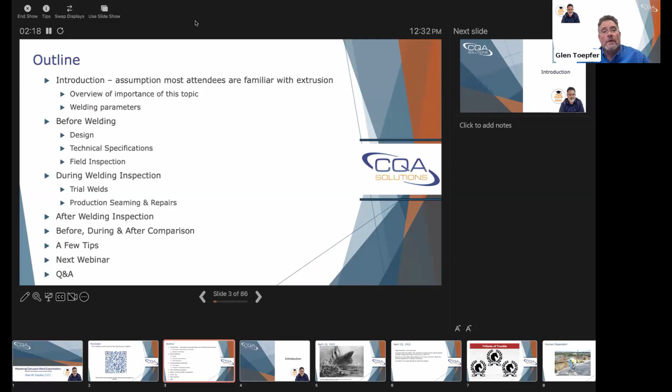As we get started here, I think the introduction I wrote for this was about the Titanic, and as we go through this, you'll see why I compare it to the Titanic in more ways than one. April 15th, 1912, was the day the Titanic famously sank after hitting an iceberg late on the 14th of April. Approximately 1,500 lives were lost.

Accounts state that the Titanic was ordered to proceed at full speed ahead, despite multiple iceberg warnings. My research showed there were at least 6 reported warnings on the 14th, iceberg warnings. They say the vessel was traveling at 22 knots, and because of that speed, when lookouts saw the iceberg, they couldn't avoid hitting it—they couldn't turn fast enough because of that speed.

I think that's one of the things in our industry, particularly in relation to extrusion welds—a lot of times it's full speed ahead, and I think we need to actually take a little warning and slow things down. I'll show you why here as we get into it.

One of the things is the trifecta of trouble, as we coined it last night when I was finalizing the PowerPoint. Extrusion welds really are error prone. They're difficult to weld, and their locations typically aren't the best places—they're being extrusion welded because you typically can't run a wedge welder there.

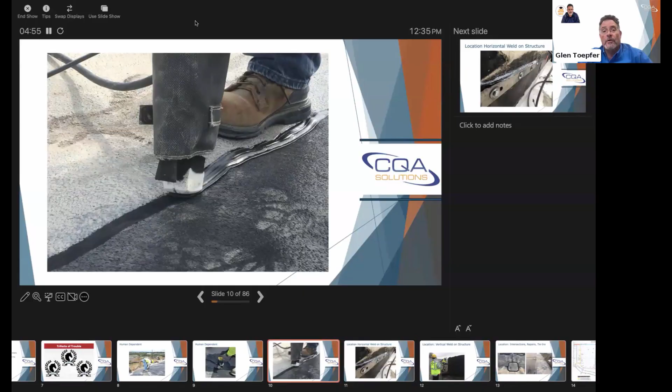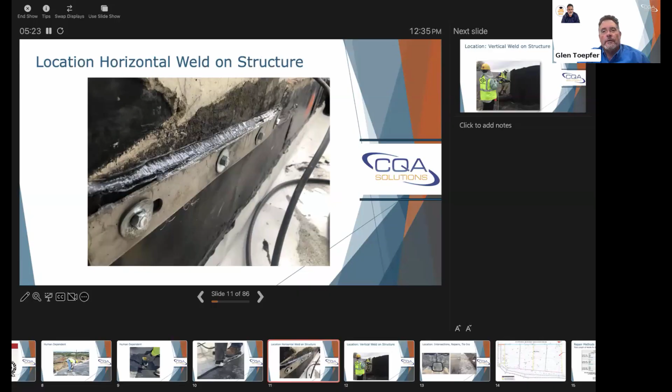Then we'll get into the locations. Here's an example—there should be caulk on the top of the batten strip hopefully, but you can see on this vertical wall there's a horizontal extrusion weld taking place on this structure, where they have to hold and support the machine in the air, which makes it more difficult than when you're welding on the ground. You're fighting gravity when you're supporting the machine.

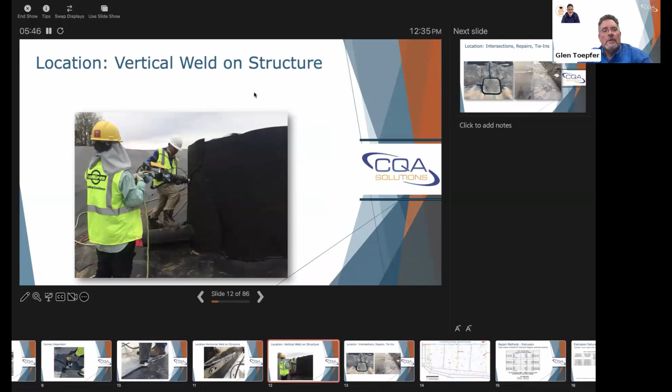Similarly, here's welding on a vertical structure where they're doing a vertical weld, but also going around—so some horizontal, different angles—and they have to keep that uniform pressure on there if you want a uniform weld. I'll get into that in a bit. As for location, intersections—you're always going to have your repairs at intersections.

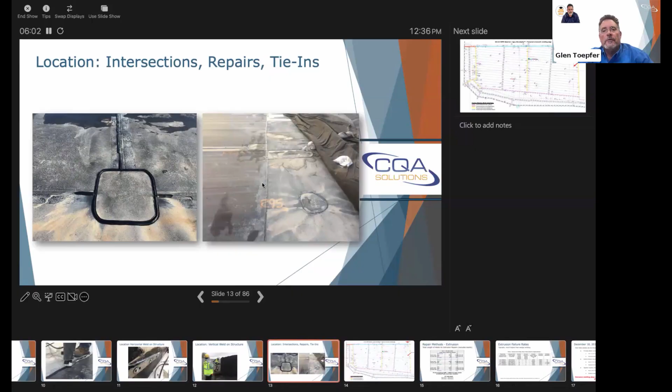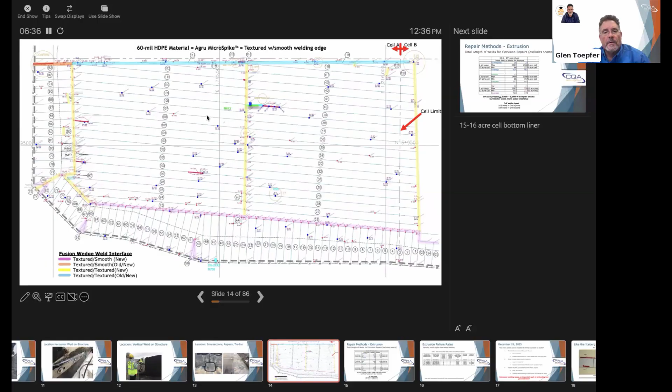Tie-ins, a lot of tie-ins can't be wedge welded for one reason or another. And you look at the whole scheme of things, this is an as-built of a cell I used in a previous presentation, but all of these dots here are intersections. Each one of those is going to have an extrusion repair performed on it. Some of these tie-ins up on the north side here were extrusion welded. Some of the area in your sump down here was extrusion welded. Just a lot of different things going on with the welding as far as it all adding up.

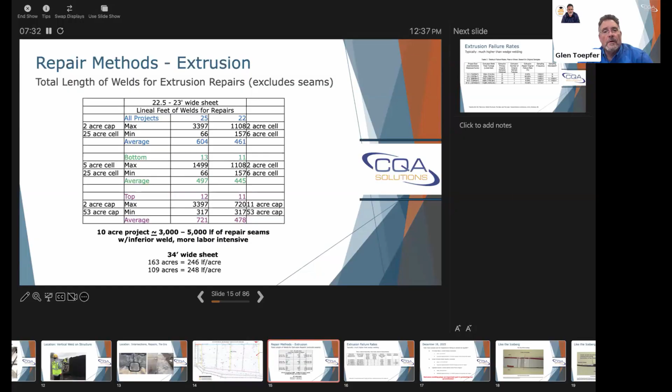A lot of people don't realize how quickly the extrusion footage adds up, but we looked at a bunch of our projects and came up with an average: a 10-acre project averaged between 3,000 and 5,000 lineal feet of repair seam. That doesn't include your regular production seams or tie-in seams. This is all just repairs. So you're putting out nearly a mile of extrudate on a 10-acre impoundment or containment system, or whatever the project may be. It could be a cap, whatever it is. But these are all labor intensive, inferior welds, and for the most part the quality is really not being monitored that much. That's part of the reason for this webinar, really, is to look at that and give you all some things to think about.

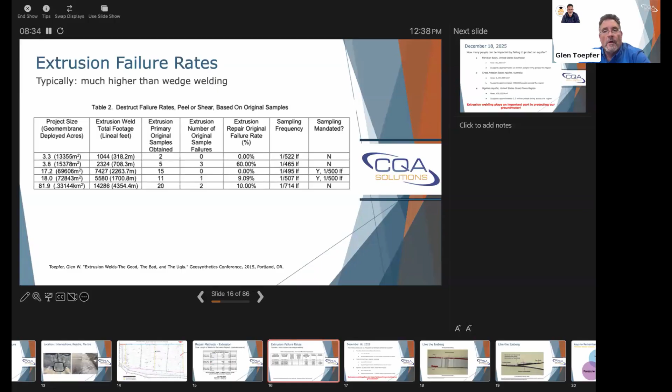So that really brings us from the Titanic to today, December 18th. Where are we? As I was thinking about it, I thought, well, the purpose of our containment systems is to protect aquifers. The Titanic, they lost approximately 1,500 people. How many would be impacted by contaminated aquifers? If you look at the Floridian Basin in the southeast United States, I forget exactly how many states that impacts, but it's an area of 161,000 square kilometers, and that supports nearly 10 million people living across the region. Similarly, the Great Artesian Basin Aquifer in Australia, 1.7 million square kilometers, but that only supports 180,000 people across the region. But size doesn't really matter. You don't want to impact it regardless. You want to keep the water safe and clean.

I'm going to butcher this name, I'm sure. I was trying to say it last night, but the Ogallala Aquifer in the Great Plains region of the United States, approximately 450,000 kilometers squared, and it supports about 2.3 million people living across the region. So we want to protect those people. And extrusion welding is a pivotal and important part of protecting our groundwater because it's a significant quantity of it in our containment systems.

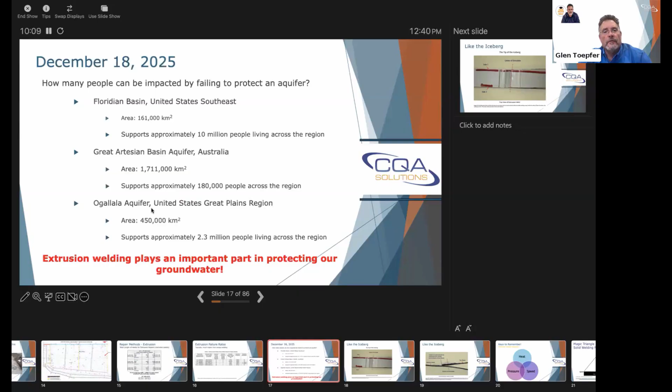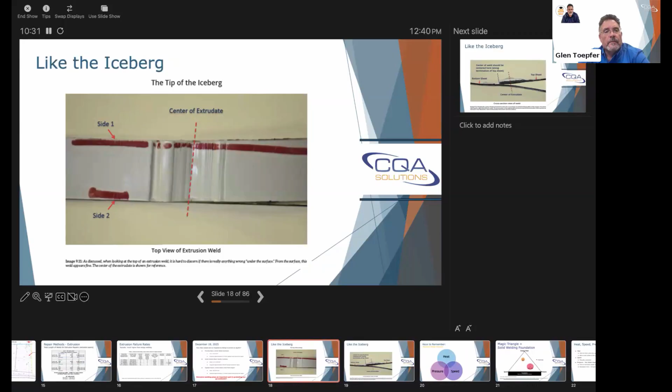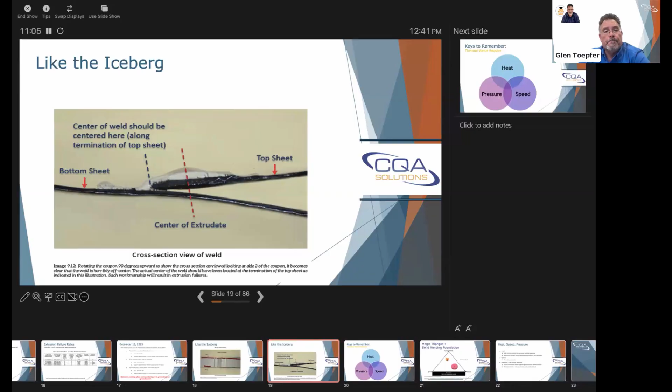And just like the iceberg with the Titanic, you're looking at a finished extrusion weld here. This is a coupon we had for sampling. Everything looks good on the surface, like the Titanic. Maybe they thought the iceberg was smaller, I haven't read it in detail there, but like they say, you don't know what lies below the tip of the iceberg. And when you look at this, you can see the center line of the weld. That joint should have been over here where the blue line is at, that's where your physical joint is at, but it's not there. You can see some squeeze out on the one side here, it's a little bigger than the other side, and I'll get into squeeze out in a bit. But those are things to look at for the quality of the weld too. It should be uniform if your person doing the welding has uniform pressure on, which we'll get into. So you just can't see what's below there.

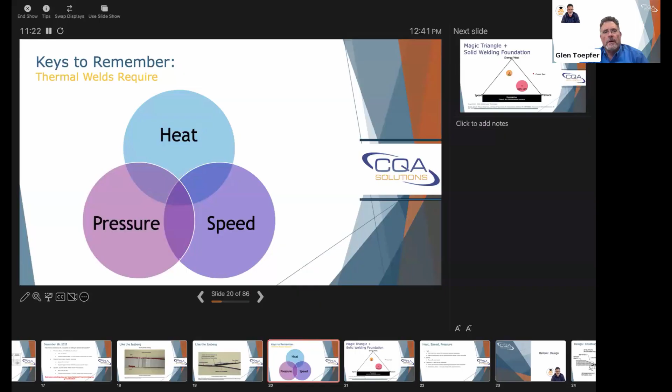Then it ties into your heat, speed, and pressure. As I mentioned earlier, those are the three things you really want to look at as we go through this whole presentation, as well as location and the other things I mentioned. But to get a good weld, you have to do your best to get that heat, speed, and pressure. Eddie Weisser from Leister presented this magic triangle concept to me years ago.

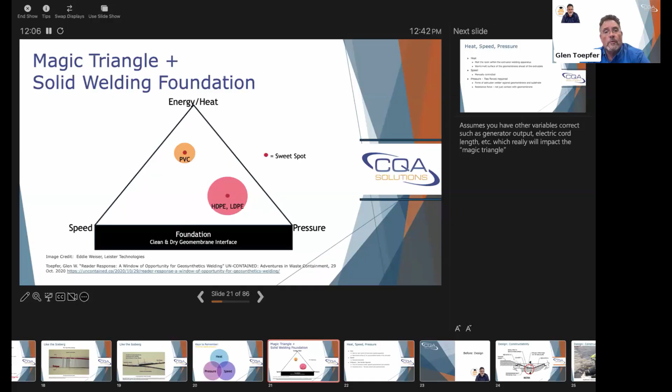How do you look at heat, speed, and pressure with an extrusion? You have two different heats on the extrusion gun. You have the heat that melts the resin in the barrel that is forced out and becomes the actual extrusion bead, and you have the preheat that heats the surface ahead of the extrudate. Both of those are important, and you want to keep them uniform throughout the process.

Speed is manually controlled by the operator. And pressure - what a lot of people don't realize is there's two forces required. You have the force of the extrusion welder against the geomembrane, and a lot of specs call out that you want adequate force against the geomembrane, but you've got to have that substrate below for resistance. If you have a wrinkle, the extruder can push down and you're not getting a good bond in the wrinkle. You're not getting that resistance pressure you need, and that's something a lot of people overlook, unfortunately.

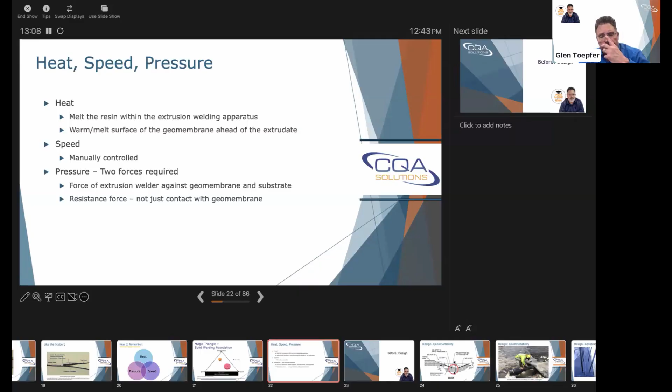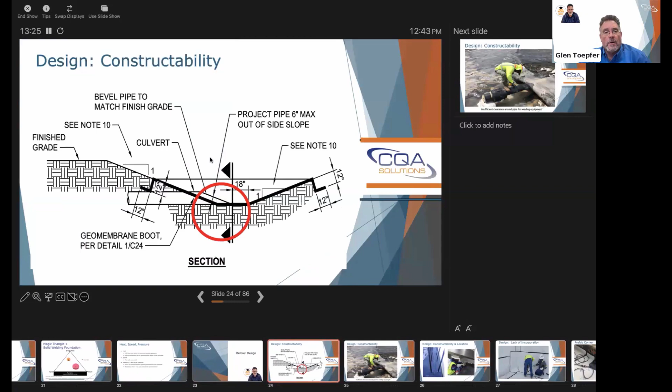So I'll try and get through the design here. Some of the things about design - one of the biggest issues is constructability. You can see in this design, this pipe is flush on the ground. There's no way to do a good boot, no way to get a good weld on that. So these things need to be considered when you're talking about design.

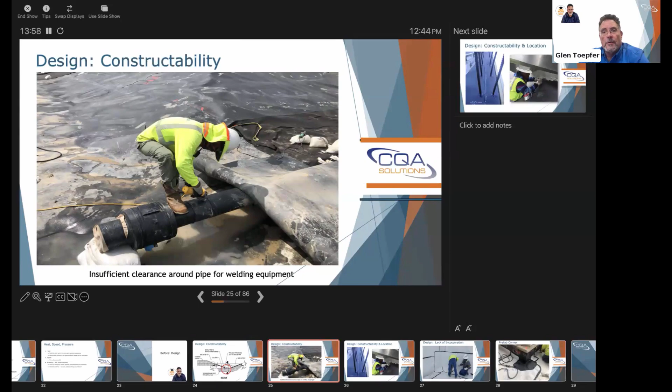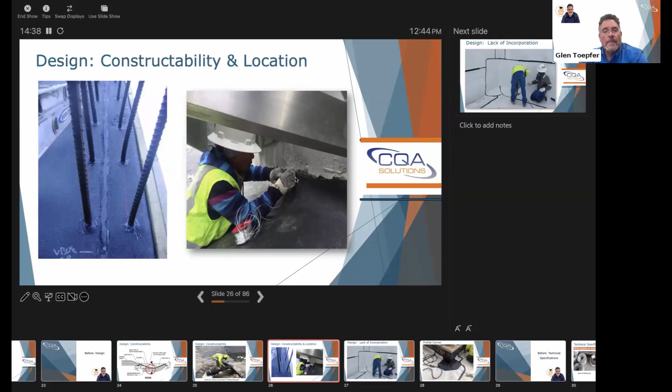You can see in this other photo the guys working in a confined area. He's putting wire in for a holiday spark test, but that's a hard area to weld there. How do you get uniform pressure with the extrusion gun? Those are all things that really need to be taken into account when you're thinking about any type of welding, but especially extrusion.

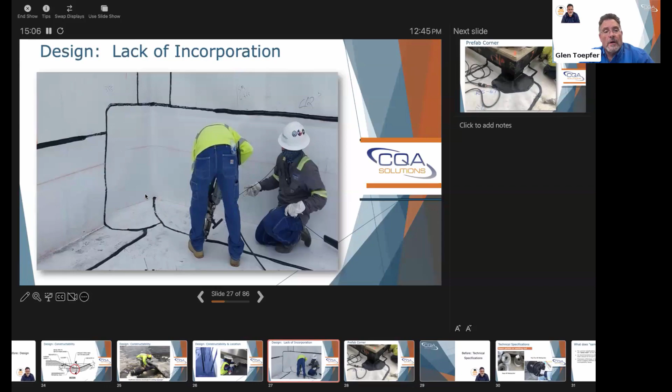Lack of incorporation of some of the things available in the industry - there are corner pieces, prefabricated corner pieces made out there. In this case, they fabricated it themselves. They actually got the weld out away from the corner, but there's going to be no good way to seal this corner. It's going to be a potential leak, and it's right at the bottom of the containment unit, right where you don't want something problematic.

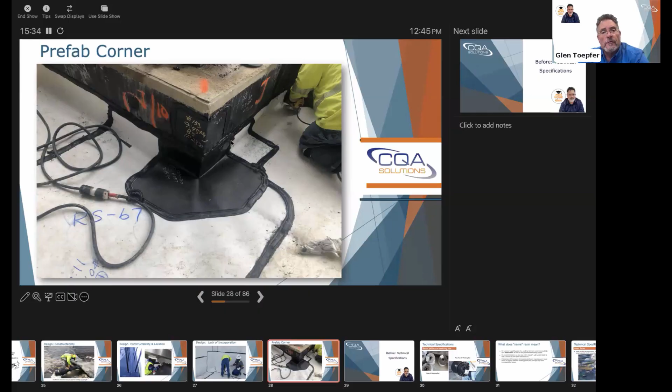Here's an example of an actual prefab corner used on a project. This project had both prefabbed inside corners and outside corners, and this is one that was used, and it helps get the weld out and away from the corner itself. A little better quality - you still have to make a transition at the bend, but it minimizes those as well.

So I'll get into the technical specifications here. Let's see - all right, yeah, thought I was having a glitch here. We had a computer glitch earlier trying to get set up.

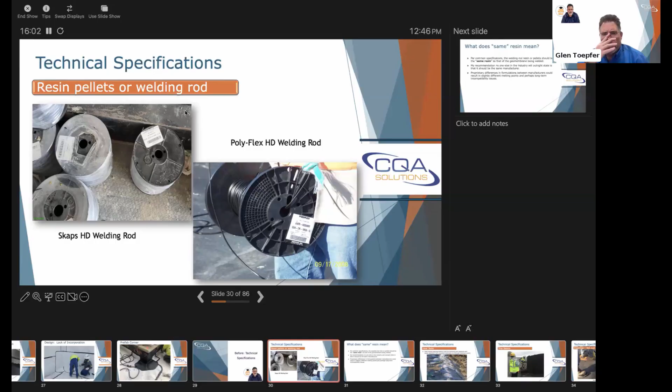So, technical specifications - a lot of times they mention the welding rod, and here you can see there's a Skaps high density and a Poly-Flex high density in the photos, and they say it's supposed to be the same resin as the geomembrane. But what does the same resin mean? Everybody you talk to will say it means if it's linear low, it has to be linear low welding rod. If it's HD, it has to be HD.

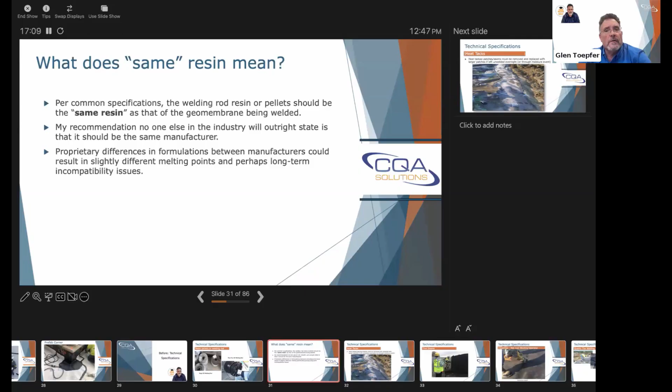But what about the same manufacturer? Nobody will really answer that question. Based on what I know, I think it should match the manufacturer. Ideally, it would match the same batch as the geomembrane being made because there are proprietary variances between manufacturers. Even though the material may meet the GRI GM13 and GM17 requirements for LLDPE and HDPE, there are proprietary variances, and how they're going to intertwine with each other chemically, melting points, things like that. So it's something to consider, and it really should be the manufacturer itself.

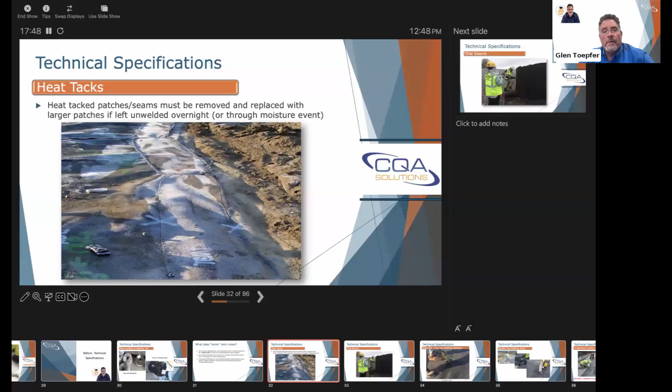Heat tacks are another thing often left out of specifications. A lot of people think they're watertight, but they're not. They'll minimize the flow of water, but they're not impermeable, and water will seep under them. Frost will get under them. Even moisture from your soil will creep out from under them. So they need to be removed if they're sitting through a moisture event or left overnight. They need to be removed and replaced, and any heat degraded material needs a larger patch. But that's typically left out of the specifications, and you end up with poor welds as a result.

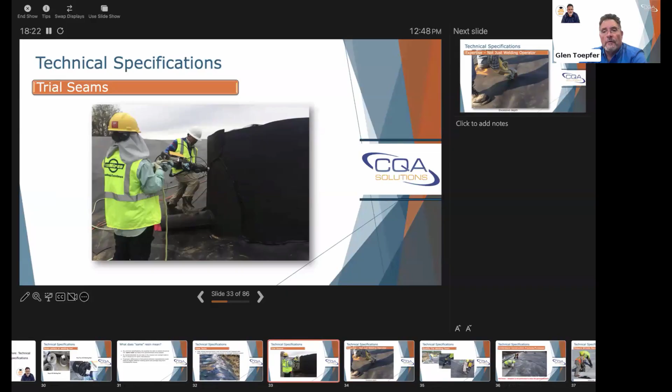Trial welds, one of the things we recommend are vertical trial welds. Hang the piece of material there and make them do welds in the same conditions, whether vertical or horizontal. In the case of a batten strip or horizontal welds, make them do that because the pressure is entirely different there. You're fighting gravity the entire time instead of allowing gravity to work for you. We've found that doing this helps increase the quality, or at least gives us a check on the quality, by actually doing a trial weld.

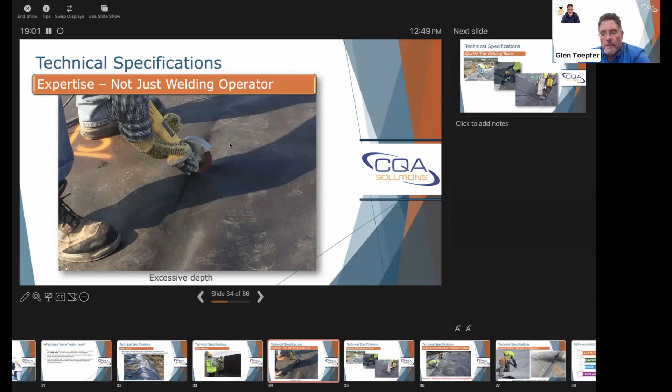Similarly, every step of the way, you have your heat tack person, they might be doing the beveling. The whole welding team should be qualified, and they should keep doing only the positions they were qualified on as part of the trial weld. You have your guy doing the grinding, your person doing the welding, obviously, but that's not the way the industry typically works. I think that's the way to get the best quality.

A lot of that stems from my experience at Palo Verde when we did the zero leak project between 2009 and 2012. There was a time where two guys kept failing, failing. They'd had success, but then all of a sudden they were failing. One guy gave up. He was a great wedge welder, had welded good, and got failures he couldn't get rid of, and he just gave up. But a different guy came on and ground for him, and that guy told me, 'He's not going to fail because I'm grinding for him.' And he was right, he didn't fail anymore in the project. So the grinder makes a big difference, and that's something we need to keep in mind.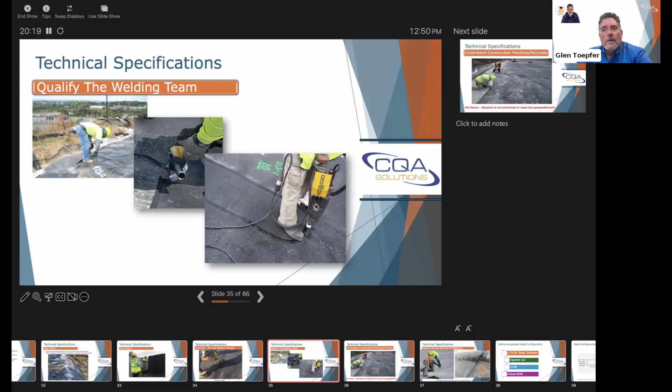You don't want to see people going in and out of the different positions. It should be the same person the entire day. But that's not what we see. I think that's the best practice.

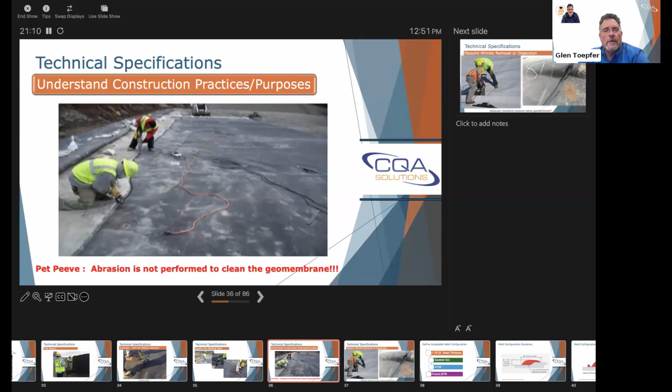Understanding the construction practices and purposes, we do a lot of constructability reviews and see technical specifications. This is one of my industry pet peeves, but I've seen it a lot lately: specifications saying abrasion is to be performed to clean the geomembrane. That's not the purpose of abrasion, that's the furthest thing from its purpose. If you're abrading it to clean it and going through dirt, that dirt's just going to get trapped on the grit and transfer into your weld, and you're going to have a bad weld. So that's something that should not be in the specifications. The grinding is really to assist the bond and remove the oxidation on the polyethylene materials for a good bond.

We should require wrinkle removal or dispersion, and you don't see this in the specifications, but I mentioned to you, you don't have that resistance pressure when they're going over a wrinkle. On this project, I took a bunch of destructs on these type of things, and probably 95% of them failed because they just don't have it.

Same here on the right. You can see the weld's starting to sink in there. They don't have the pressure. Maybe they lost their overlap there. It's hard to tell, it looks like there's separation, but you don't have that pressure, and that really should be required. A lot of times these wrinkles can be walked out. If they can't be walked out, then they should be cut out and repaired.

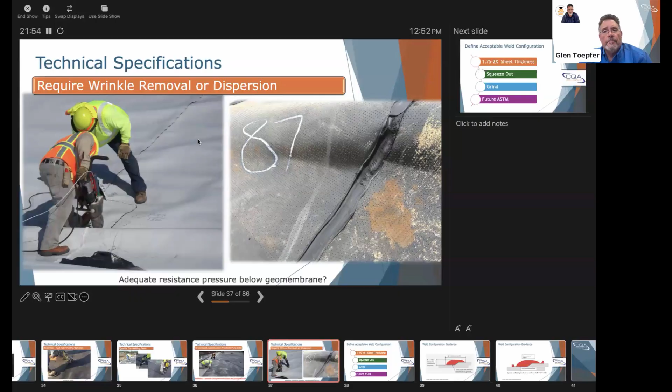Another thing missing from the specifications, and really causes a lot of the issues in the field I feel, is that there's just no acceptable guidance on the weld configuration. There's a future ASTM coming out on that, and I'll be happy when that comes out because I think it will help alleviate some of this as we move forward.

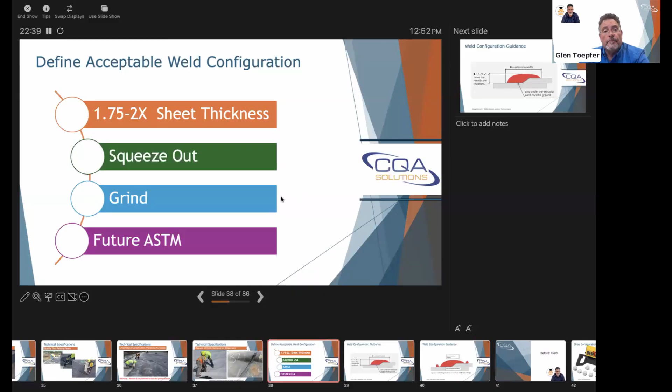Your weld thickness should really only be 1 3/4 to 2 times the sheet thickness based on a lot of information, a lot of research by people. Your squeeze out should be limited. It should be uniform on the sides. Your grind should be covered, and it shouldn't be too wide. It shouldn't be too deep.

As we go here, I'll illustrate, courtesy of Eddie Weiser with Leister, some images that he has. The red area is your extrusion weld. You see the bevel there. You have your width of your welder. The area underneath the weld should be ground, and then your thickness should be 1 3/4 to 2 times the height of the geomembrane.

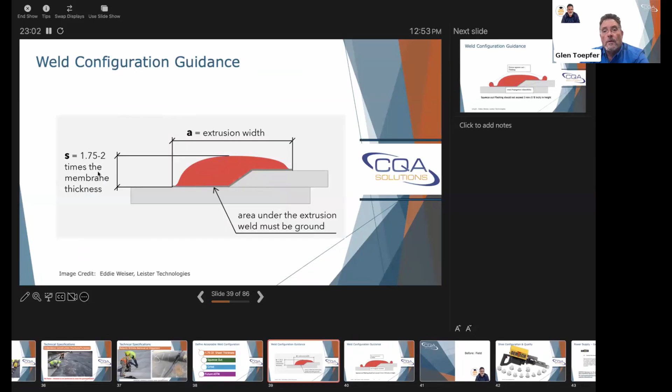Your weld configuration, you can see here, Eddie's diagram has the squeeze out, and you can see that studies have shown that with excess squeeze out you get more heat there, you get crack propagation vulnerability, and that can cause stress cracking in the future. So you want them to be uniform, but the recommendation is that they should be 1/8 inch in height or less.

So now I'll move into, before you get into the field, I'm kind of through the design and technical specs, so we'll get into more of the things to look for in the field here.

It needs to produce a weld that's going to give you that 1 3/4 to 2 times sheet thickness. So that means that if you're working on 40 mil and you go to 60 mil, it's possible you need to change your tip. But a lot of installers will grind these out and make their own shapes, and those shapes don't always conform to what the general guidance is.

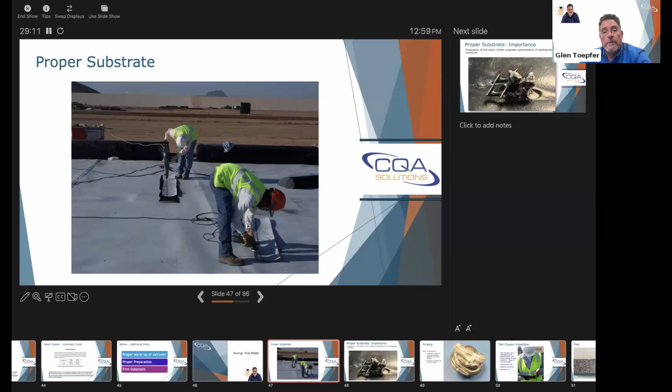And the importance here is shown in this photo. You can see this was actually cut out of a patch we took a destruct on because there was a sunken area, but they were overheating the tees. In this case, the extrudate was overheated so much it forced itself through the underlying geonet and bonded with the geonet when it cooled. It shouldn't be doing that. You shouldn't even be getting that overheat, but that would have had disastrous consequences with the expansion and contraction of the materials, as well as any stress that would have come on it during use.

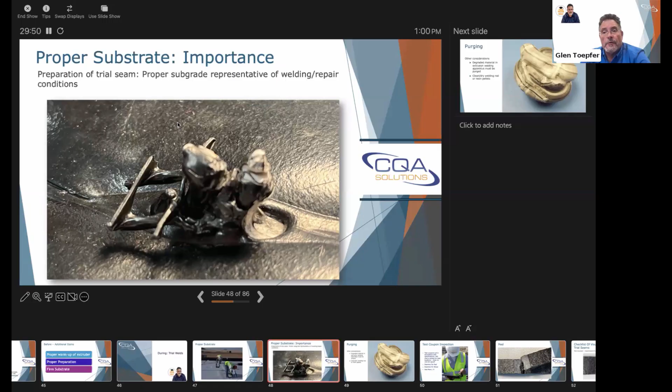You don't want to see them throwing it on the geomembrane either. They need to properly dispose of it. But you also want to make sure that the welding rod or the pellets going into the extrusion gun are always clean and dry.

Then for trial welds, as you go on, you get your coupon inspection, and really you should be inspecting that whole length of the trial weld for everything we're going to discuss here. That's part of it. You don't just look at the coupons, you look at the trial weld as a whole, make sure they're centered, things like that I'll get into, but I'll start with the coupons.

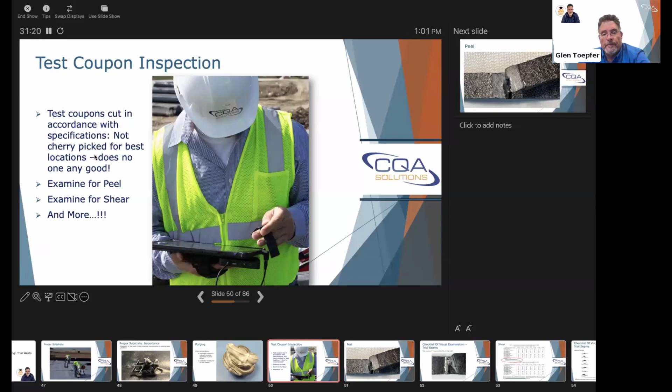You can see they're going to be tested. You want to make sure that the installer's not cherry picking the best spots. You should look at it; if you've got a place you want them to test, then they should test it there. Then you're going to examine for peel, for shear, and obviously for more things. Peel, obviously your peel separation. Here's 100% peel. It's not always cut and dry.

This one's a partial peel. You can see some of the white there. Is it greater than 25%, which is most often the cutoff?

I don't know, but our recommendation is always to start the trial welds with 0% peel incursion allowable. Why let them start with anything more, closer to the maximum? If they're starting at the maximum, there's no room for error. If they're starting at the minimum, then they have a little bit of flexibility. Maybe there's a speck of dust, maybe there's something else that's not going to cause it to fail.

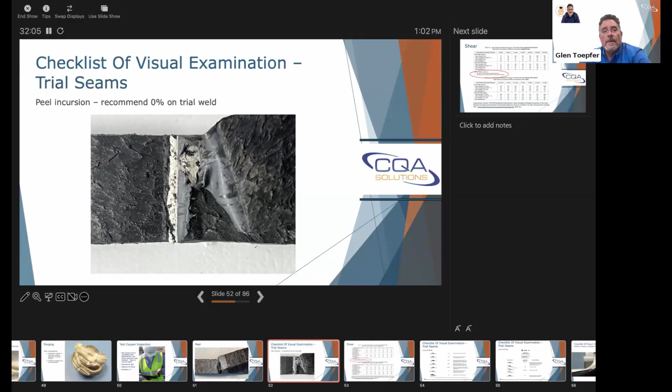Shear, this is the table from GRI GM19A. And one of the things I disagree with on the GRI is note 2 here, elongation measurements should be omitted for field testing. I disagree with that, particularly for extrusion welding, because I've seen them fail. If they grind too deep, if they overheat it sometimes, usually it's the grind as far as I can tell. Usually the grind causes them to have elongation that's less than the 50% required.

If you're not doing that out in the field, I understand why they don't want to do it. They want to speed the process up. But again, sometimes full speed ahead isn't the best course. And I think this is one of those, at least for extrusion coupons, because we get destructs back that fail.

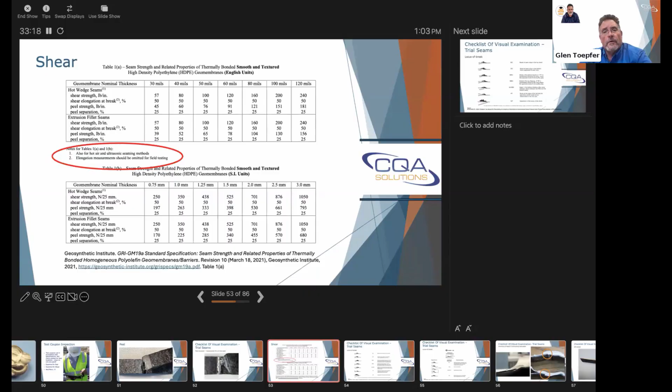We get a few back every year that fail elongation. They're 25, 30% elongation, they fail. And now you got to track destructs. Now you got a bigger problem. You got to fix things when potentially you could have avoided it in the first place with your trial welds, which is the whole purpose of the trial weld to begin with.

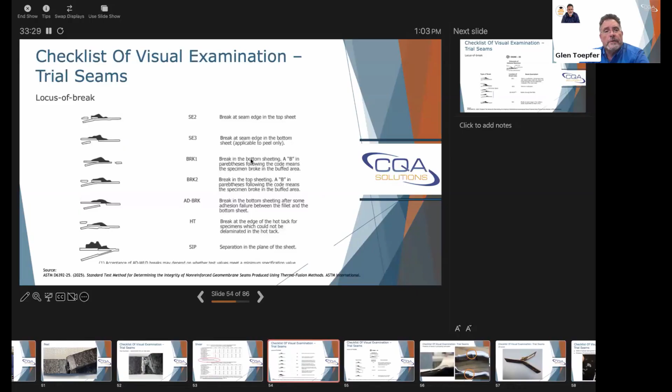I just threw in the locus of break. You should be looking at the locus of break just to make sure they are passing and that you're familiar with these when you're examining the coupons.

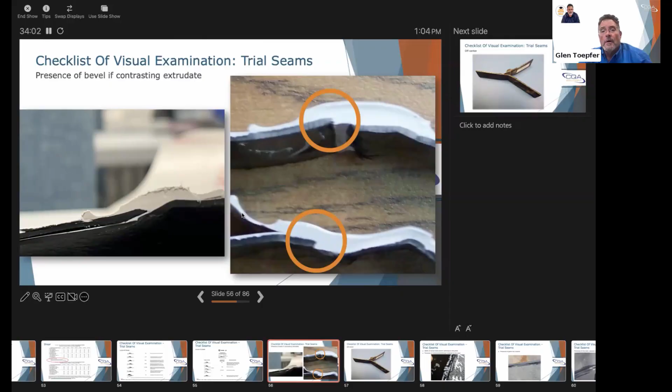Then you want to look into other things that indicate weld quality. Is there a bevel? If you have contrasting extrudate, it's a lot easier to tell if there's bevel. The white extrudate on the black is pretty nice for that purpose, but with black on black, a lot of times you're not going to be able to see it, so you have to physically be there to make sure that they're beveling. And that's just an unfortunate truth, but you can see no bevel here, was pretty obvious.

Is the weld centered? We discussed that one earlier, but here's another example where you'd be lucky if it even holds together, just passing it around in our classroom most of the time because it's so far off center, it's unbelievable. But again, you can't see that when you're looking at a finished weld from the top.

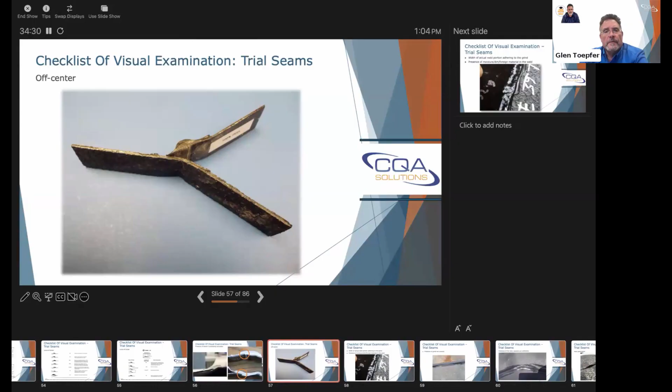So if you see any of these things that are issues, you should be failing the trial weld. You should make them do it, right. If they got areas that aren't adhering, if they're over grinding, they have dirt, anything in the weld.

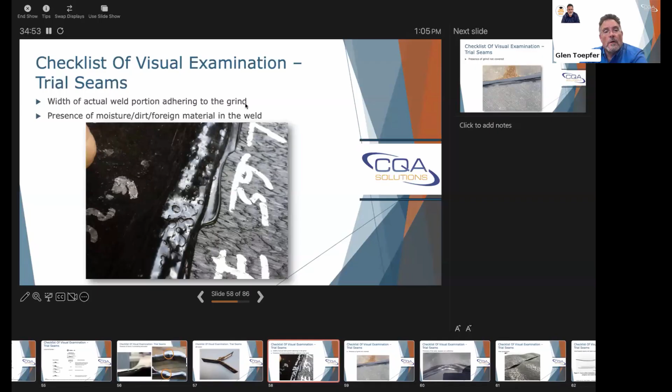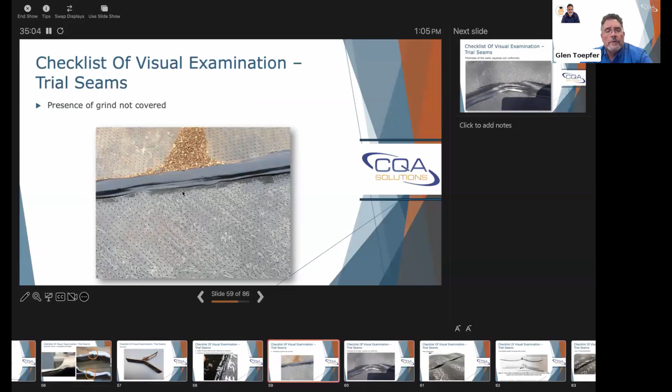This is an example where there's moisture getting in a weld. Sometimes you'll see it not as much in the trial welds, but we have had people dripping sweat into the weld, and we got to ask them to put a headband on or do something like that to help reduce the sweat. But again, grinding, if you see any of these things on a trial weld, it shouldn't just be based on peel and shear. You should be failing them, you know.

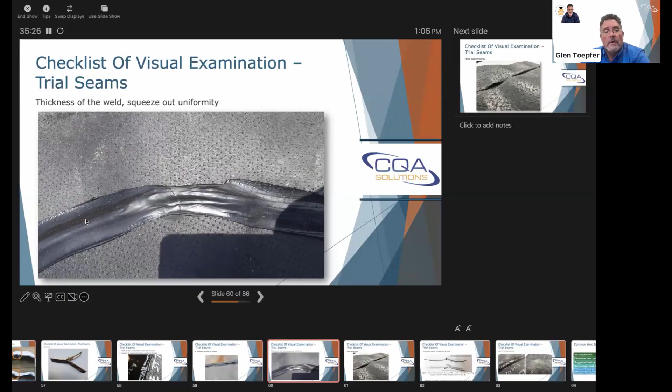Your heat penetration, this is signs that there's separation. The material's separating there, so you're not going to have any strength there. So it's going to be an issue.

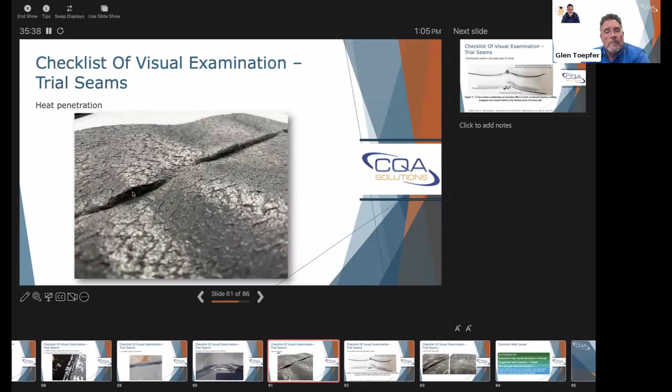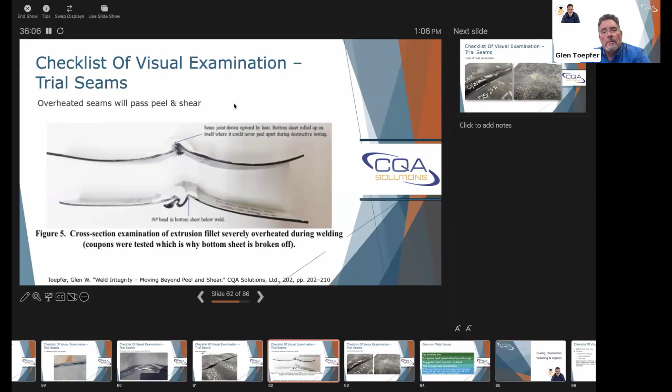Same thing here, it's overheating. They're sucking the base material up from the heat. It's bending drastically, almost a 90-degree bend. That's going to pass a peel test because you can't make it peel when it's bent like that. I mean, your material is going to fail because it's bent so bad, but that's bad for the long-term liner. It's going to be crystallized, it's going to be overheated, become brittle, and be a weak point in the system.

Then your lack of heat penetration as well. You can see this in a trial seam. Here's your weld, but in here where the seam is, there's no heat transfer. So you should see a minimal indentation on most of your sheet products that are showing that you have at least adequate heat penetration.

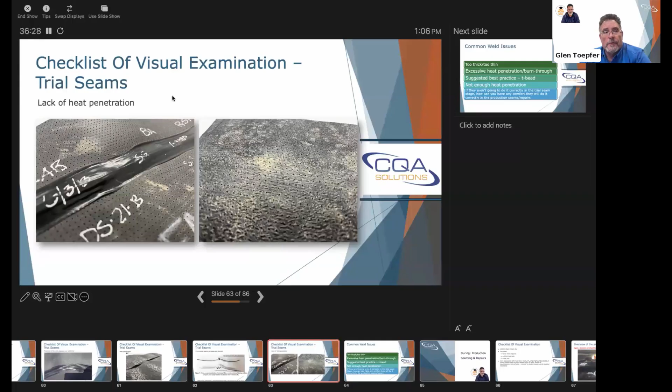Some of the other common issues, I mentioned too thick or too thin of a weld. We've seen welds that are paper thin, and of course they fail, but they shouldn't have even brought them to test when they're that thin most of the time because those will typically fail. Too thick won't fail, but I mentioned the inconsistent cooling.

Due to excessive heat or burn-through concerns, one of our practices is to suggest a T-bead during the trial weld. You can't physically test that with your peel or shear test, but have them weld up into the weld they were doing for the trial weld, then look at the bottom to see if there's enough heat penetration. If they're overheating it, it gives you a better feel for whether their technique is going to be successful or compromise the liner when they're doing it in the field.

This is especially important because a lot of projects won't let you take destructs on smaller repairs. But if I take a destruct on a patch, I like to have the whole patch cut out, because I don't want to crisscross welds - which I'll get into later - and that allows you to look at the T's as well. The big point with trial welds is: if they're not going to do it correctly on the trial welds, what makes you think they're going to do it correctly anywhere else on the project?

That's why the whole team should be tested. They should be tested as a team.

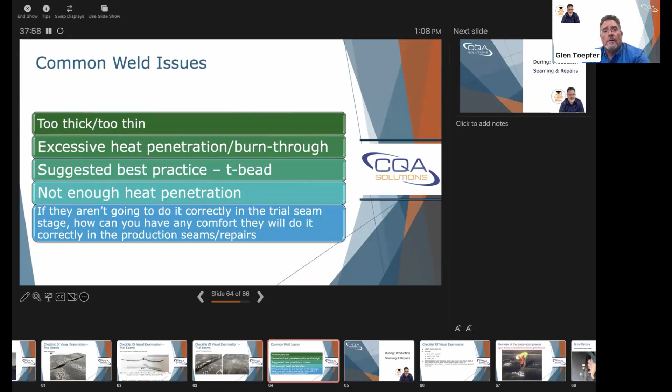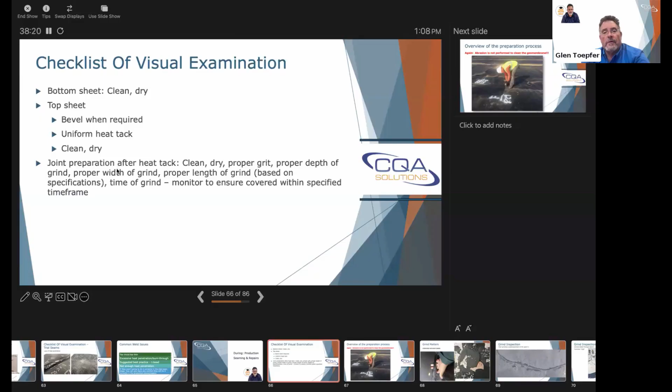Moving on to production seaming and production repairs - again, you need clean, dry materials. Your top sheet has to be beveled, with uniform heat tack, clean and dry - all the basic things we've discussed. Proper width of the grind and proper time of the grind. You need to make sure it's covered within the allotted time, because otherwise dust gets in there and it oxidizes, and once it oxidizes, it's not going to adhere.

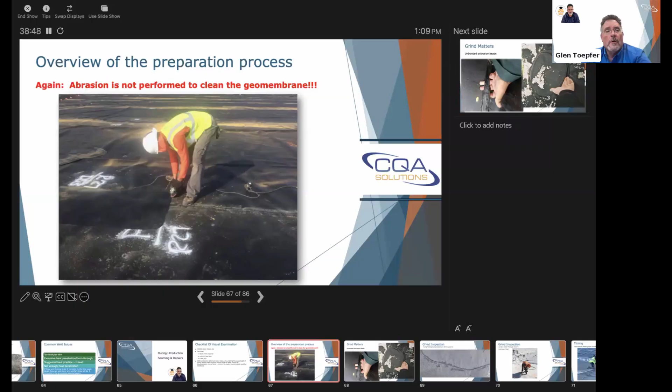My pet peeve - so many specs I've seen lately don't require abrasion to clean the geomembrane. We just need to learn that if you don't have that in the spec, it's just going to compromise the weld. So why do we need the grind? As I mentioned, it helps the extrudate adhere.

It's a Demtech - he didn't have a clue, and they didn't know they needed a grind on the HDPE for extrusion welding. So at the toe of the containment slope, when I inspected it, all of his beads were laying at the toe because they fell off the wall he had welded them to.

These extrusion beads - even if you have a pinhole and you're using one to cover it, which I never recommend, I think pinholes should be patched - but I've seen it personally where they ran an extrusion bead over a pinhole. They dropped an air test needle or something, I happened to see them do it, and they said 'Oh, it'll be okay, it'll pass.' They vacuum boxed it and spark tested it, since it was a conductive material. Both passed, but it would fail in the long run, so I made them cut it out and repair it.

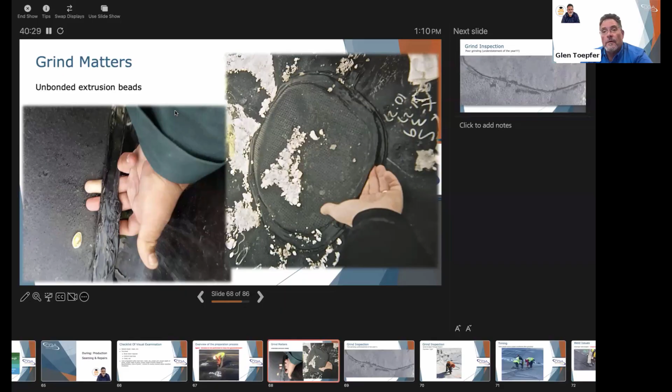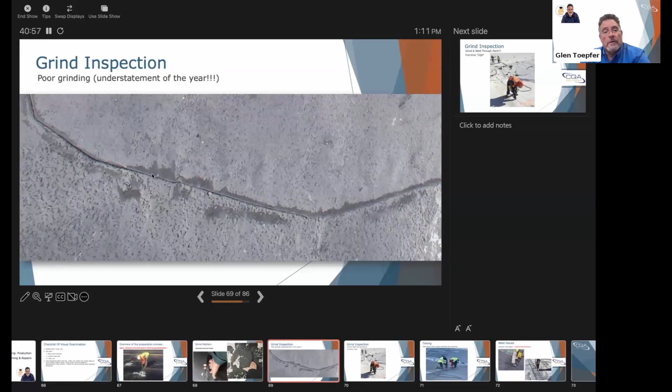Here's another grind inspection example, again from a shale gas project - these people shouldn't have even been allowed to set foot on the project. You can see the grind is pathetic here; they don't have it consistent, and you need consistent grinding. But if they somehow manage to cover this, you wouldn't know that only one side is ground and the other one isn't once it's covered. You have to be there to inspect it.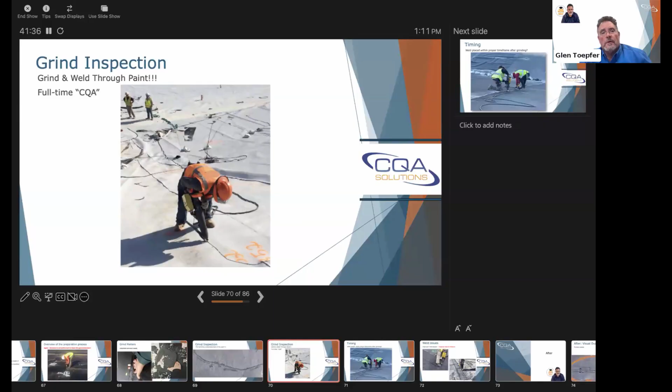This was under full-time CQA while we were doing an audit. Here's your two CQA people - they're down at the toe of the slope, not paying any attention to what's going on. You need to be up there seeing things firsthand so you can catch these problems and deal with them.

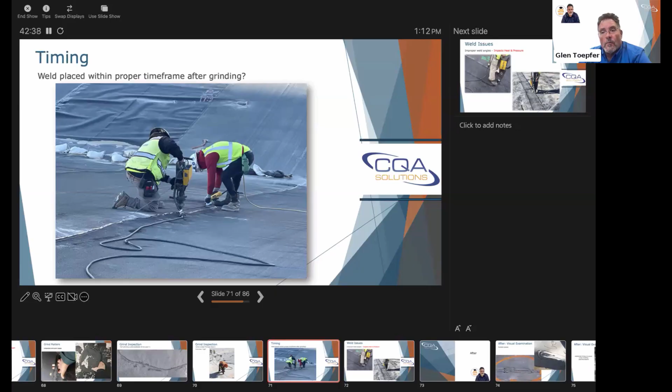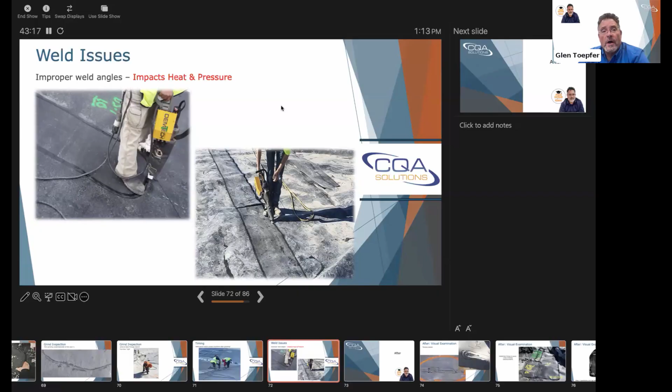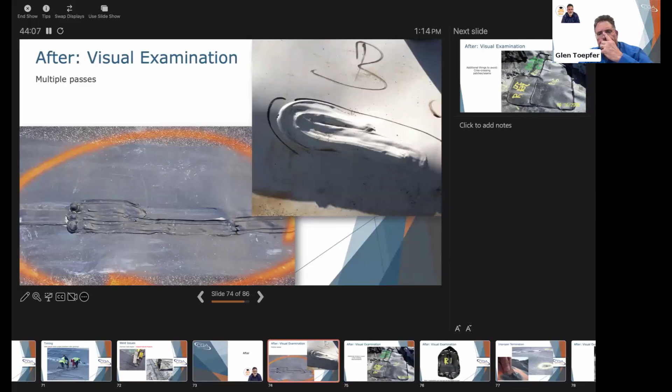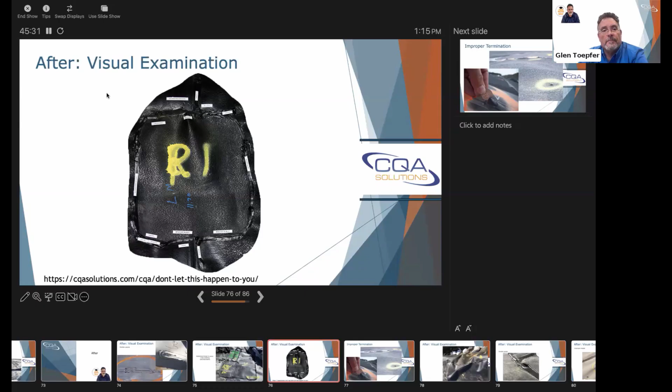So we just gotta stop it. You see bad stuff, get it fixed.

We talked about the cooling differential and thick weld. Same thing happens here.

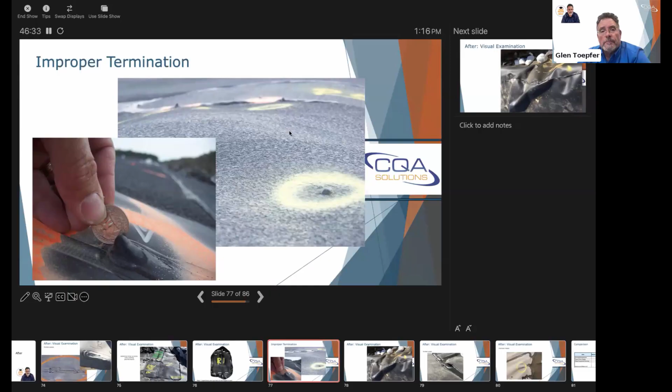You can induce stress because of the different cooling rates, as well as what if you're putting another material down on top of it? Now you've got all these sharp protrusions all over the place that have to be dealt with, and they can be ground down, but what is grinding them down doing to the extrudate? I'm not sure, that's something I don't know, but I don't like it, and that's something they shouldn't do.

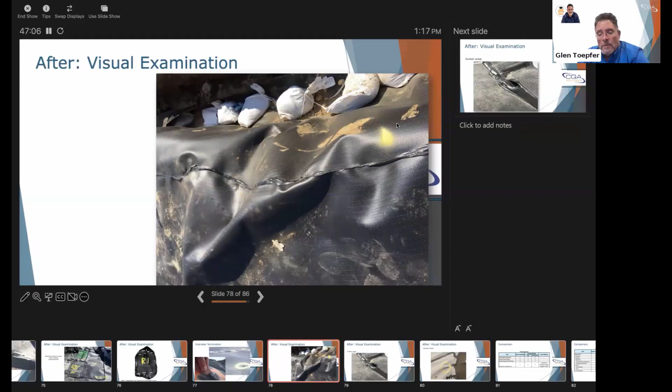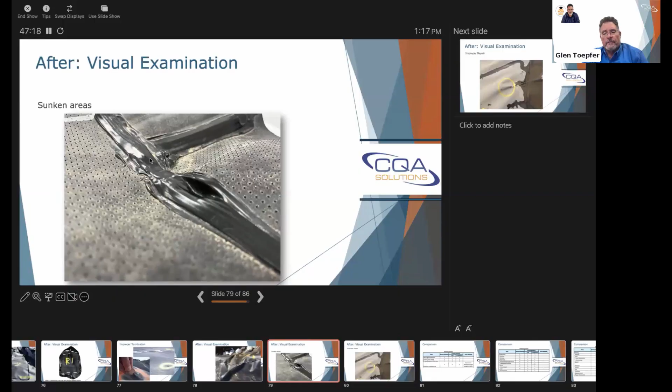Improper repairs where there's a wrinkle here - they should have continued the cut. There was a cut made here, they sealed it with the extrudate, and that's going to be a bad joint. It's going to fail at some point because you put stress on there. It's going to pop off of there. So they should have continued it, and we had to make them do the proper repair later.

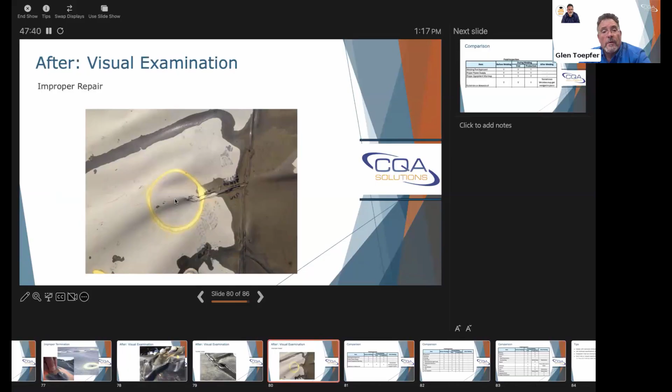So as I mentioned in the beginning, the introduction, I was going to do a comparison here as we start to come to a close of this webinar. And from the field inspection perspective - before welding, during welding, the trial and production welding, and then after welding - can you confirm these items? Can you guarantee that they followed the specifications?

Were they done properly? And the Ys indicate, you can see them - the welding rod, was it approved? Yeah, you can check what they're using all the way through the production welding. Once it's down on the ground, unless you checked, you won't know what was welded. It could have been HD, it could have been polypropylene or something, you won't know.

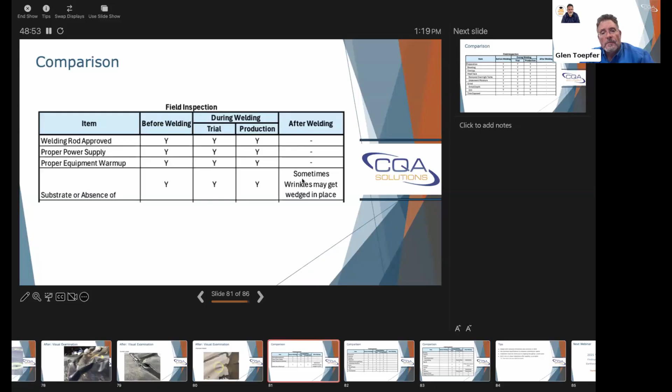Power supply, you can catch the whole time. Proper equipment warm up, you can catch. Substrate or absence of it, you can catch it all the way up through after welding. One of the pictures I showed you, you could see that it didn't have the proper substrate below it. You could tell that by the weld quality.

The preparation activities - your beveling, overlap, heat tack - were the heat tacks that were left overnight removed? Did they undergo any moisture? You're not going to know. You won't know anything afterward. You have to be there to see it to know.

And with the moisture, I've seen where operators - a couple projects I've been on - the operator's welding and there's moisture either coming from the subgrade below or frost, something like that. And the operator really doesn't see it because they're bent over the gun and they don't see right ahead of the gun. But if you're inspecting and you're standing there, you can see a little water bead being pushed sometimes, and they're welding over it, and it's not even showing up as bubbles in the weld because it's so small, but it ruins the weld.

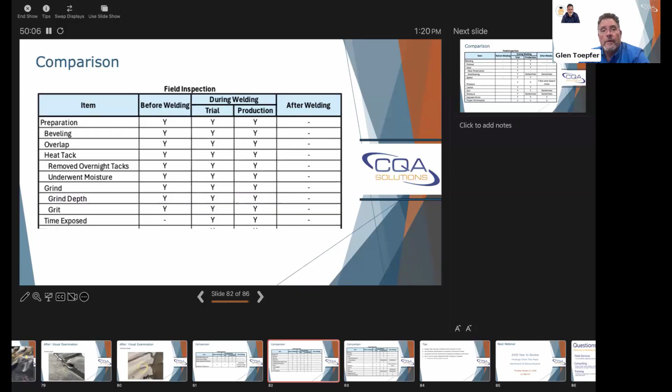We took a destruct on it and he cut it and there were voids there. And the installer was surprised, and he believed me finally, but it happens - and he wasn't trying to take shortcuts. He was trying to do a good job. He couldn't see it from his perspective. So that's the importance too of third party inspection.

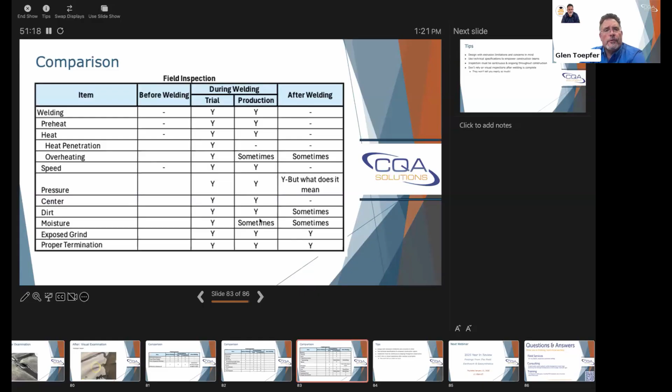So, some of the tips - design with the extrusion limitations and concerns in mind.

The things we mentioned here: constructability, making sure they have proper substrate, firm substrate, and minimizing extrusion welds, I think is the way to go. Only do them if you have to. That's what we did at Palo Verde. You couldn't have an extrusion weld longer than 10 feet there, with zero leaks. And repairs, if a destruct test failed, that was a minimum of 20 feet. Those were all fusion welded, and then we patched the ends, minimizing the extrusion because it's problematic, a necessary evil. So with a necessary evil, the best thing to do is minimize it.

Use the technical specifications to empower the construction teams. There's a lot of tips I gave you, like vertical trial welds and best practices, that you can use and get in there—the resin and things like that.

Remember, inspection must be continuous and ongoing throughout construction, particularly for extrusion welding. My recommendation, though it's rarely been done except maybe since the early 90s when I started, is that you should have one person inspecting each repair crew so you can keep track of what's going on. That's the only way you're going to see it. You can only keep an eye on so much out there, and if you're not right there with the extrusion, there are so many things that can go wrong.